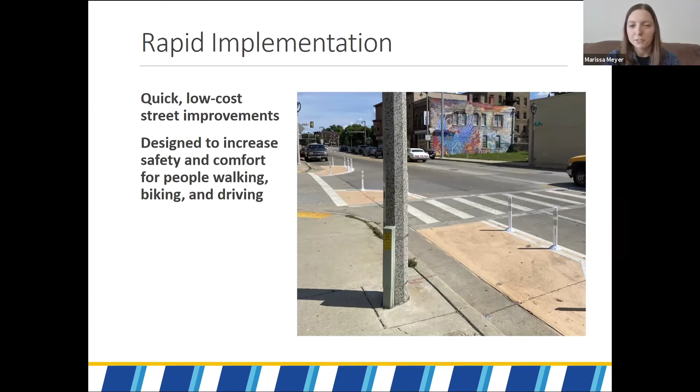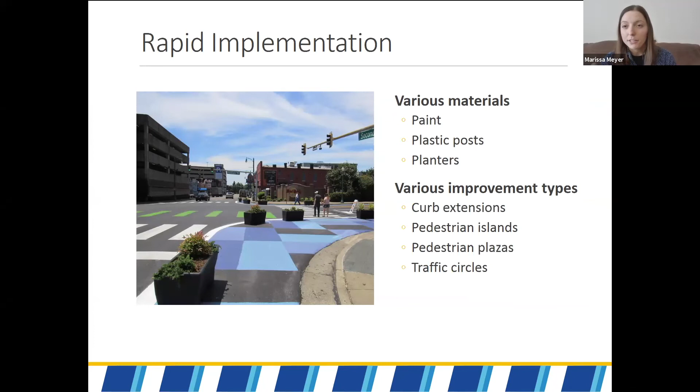These can be done with various materials. Usually paint and plastic posts are the primary ones used, but there can also be planters or other objects, even bike share stations or bike racks. And they can be a number of different types of improvements too. Today I'll be talking almost exclusively about curb extensions, but this rapid implementation style can also be used for pedestrian islands, pedestrian plazas, such as closing off a right turn bypass lane, or traffic circles as well.

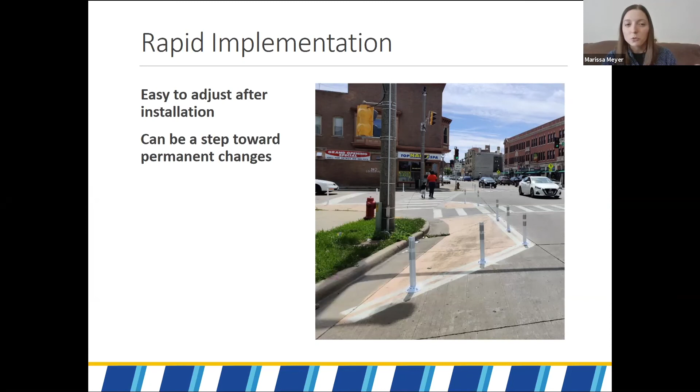These projects are easy to adjust after installation. For example, if you install these posts and it turns out the street is actually a little bit too narrow, you can come back in and move the posts another foot or two out. Whereas had you built that in concrete from the start, that would be a much more expensive change to make. But these projects can be a step towards permanent changes and building something in concrete.

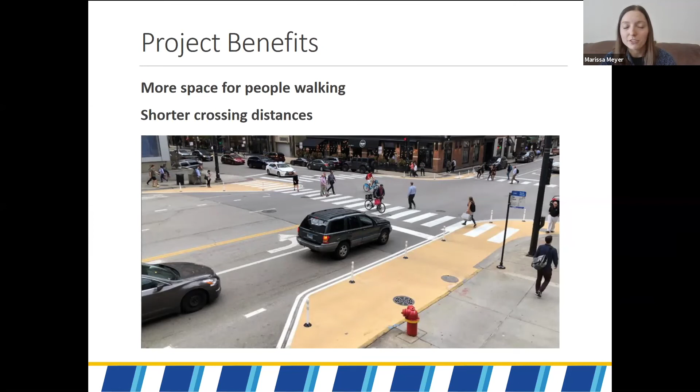One of the main types of benefits of these projects is that it literally creates more space for people walking. You can see in this image where a space of the street that is not sidewalk has been carved out for people walking and turned into a kind of pseudo sidewalk. And they also shorten crossing distances. If you can take 5, 6, 7, 8 feet from both sides of the street, that's that many fewer seconds that someone walking is in the street and potentially vulnerable to getting hit by someone who's driving.

They can also change the behavior of people who are driving. For example, if you build a curb extension, even if it's rapid implementation and it's only really plastic posts, people don't want to drive over those. So if a person is stopped, such as if they're going to turn left or if they're waiting for someone who is going to cross the street, instead of being able to whip around on the right side to pass that person, this rapid implementation stops that from happening, which is a major safety benefit. Rapid implementation can also slow motor vehicle speeds a little bit because they narrow the street visually and also tighten the turning radius, which forces people to slow down as they're taking a turn.

Another benefit is preventing illegal parking. In Milwaukee, we have an ordinance against parking too close to a crosswalk, but often that is not abided by very well, and you'll see people parking right up against the crosswalk. The problem with that is that it reduces the visibility of people who are about to cross the street, both from a person driving to the person walking and in the other direction as well. Rapid implementation can increase yielding to pedestrians, partially because of that visibility factor. It literally makes it easier for people walking and driving to see each other, and also because it sends a different message to people who are driving about what the purpose of this street is.

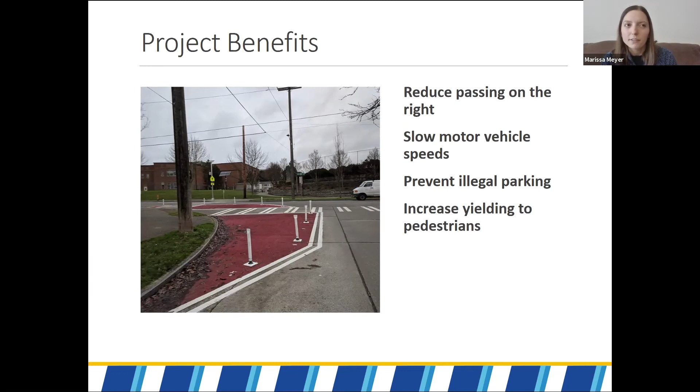So in 2020, we at the City of Milwaukee wanted to pilot this rapid implementation idea because we had seen it done in other cities very successfully, and we wanted to try and do it ourselves. Part of the reason for doing this was to address concerns about traffic safety that have come from our community all across the city.

Initially, when we conceived of this project, we were thinking that it would be funded by community organizations, primarily business improvement districts. But with the multimodal unit budget, we were able to fund it with city money, which did make it more equitable because we weren't putting that funding burden on the business improvement districts.

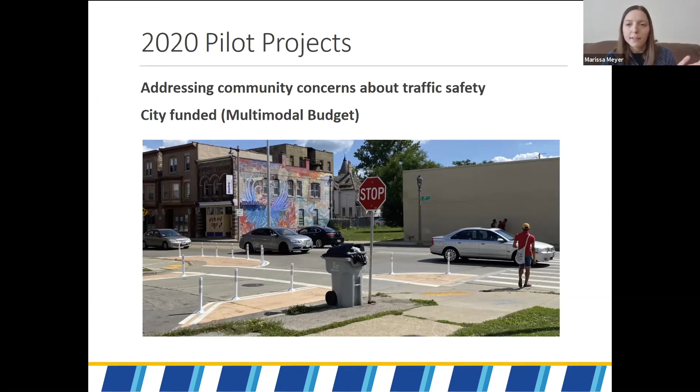We chose two different corridors, one north side and one south side, to do these projects on. For South 13th Street, we did 6 intersections, spreading from Harrison Avenue to Oklahoma Avenue. And then on North 27th Street, we did 4 intersections from State Street to Wells Street. For South 13th Street, we paired with the Crisol Corridor BID, and for North 27th Street, we paired with the Near West Side Partners.

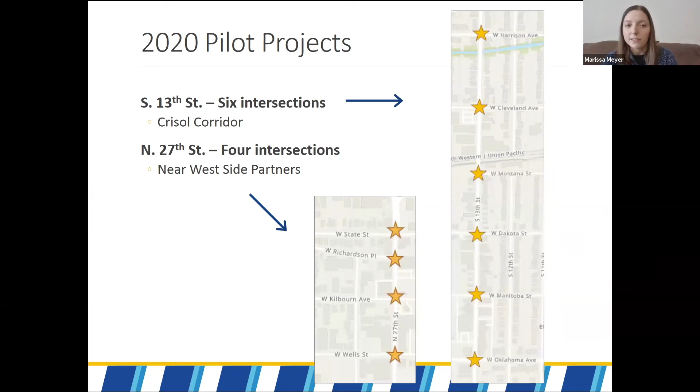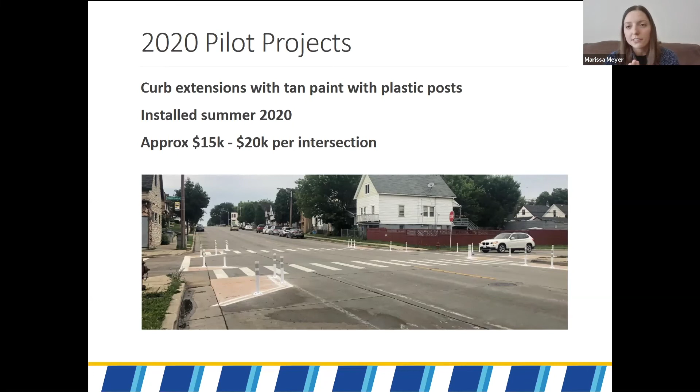For these projects, we did curb extensions with tan paint and plastic posts, and we installed them in summer of 2020. The cost was about $15,000 to $20,000 per intersection. We do hope that in the future that cost will come down because the bids were higher than we expected, so we're hoping in future years it will be even more cost effective than it was initially, because these costs are significantly lower than doing an intersection in concrete.

In order to do these projects, we needed to sign maintenance agreements with the BIDs, because one of the big concerns going into them was, if for example posts got knocked down, what would we do? How would we take care of it?

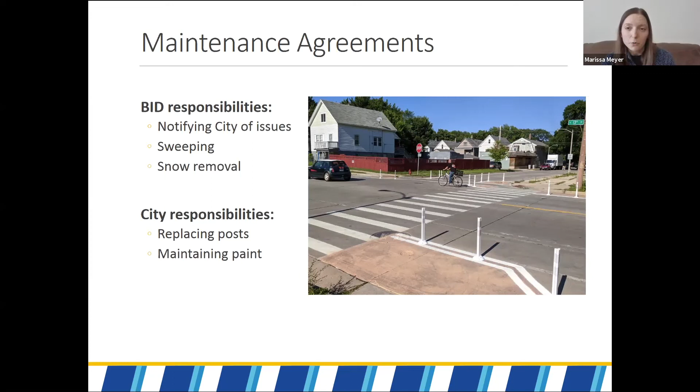So the BIDs were responsible for notifying the city of any issues, like posts getting knocked down, sweeping out these curb extension areas if debris was piling up because our city street sweepers can't reach behind the posts, and also removing snow, since similar to the street sweepers, the snow plows can't reach behind these posts. So we needed the BIDs to clear out the snow from the crosswalks so that people walking would still be able to get through. Meanwhile, the city responsibilities were replacing any posts that got knocked down and also maintaining the paint over time.

We were able to do a few different types of before and after studies, mainly speed studies, yielding studies, and some community surveys. With speed studies, these were done with a radar unit that we attach to a pole and just leave up for several days, and then we analyzed the results that it gives us.

We saw reductions in people's speeding, so just going over the speed limit to any degree, between about 10% to 18%. And then the really positive thing was that we saw a reduction in excessive speeding, so 10 miles per hour or more over the speed limit, of up to 40%. We know that speed drastically affects how serious injuries can be if a person driving hits a person walking, so seeing that reduction in excessive speeding was really encouraging.

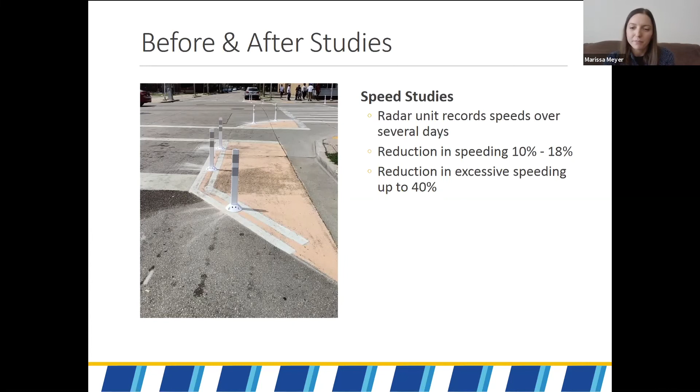We also did some yielding studies. These were done by having an observer, one of our transportation operations assistants, go out to some uncontrolled crosswalks on both of these streets. Uncontrolled here means there was no stop sign or stop light forcing the person driving to stop, so they would have to see the person walking about to cross the street and stop for them. The observer observed people who were naturally crossing the street already, and also conducted some test crossings too, in order to have more samples to analyze. Because, for example, if we only had 10 before and 10 after samples to look at, then it would be a lot harder to see changes between them over time.

We did see increases in yielding, which again was really encouraging. Mike Amsden actually mentioned these. We saw an increase of about 23% on North 27th Street, and on South 13th Street, because the initial yielding rate was so low, about 3%, we actually saw an increase of 6 times over the previous rates of yielding. So again, this was a huge benefit of this type of project.

Lastly, community surveys. As has been mentioned, the Safe and Healthy Streets survey on North 27th Street, we don't have the results from yet, but we were able to look at the Envision South 13th Street Together survey, which was done by the city's Department of City Development in partnership with some other community organizations.

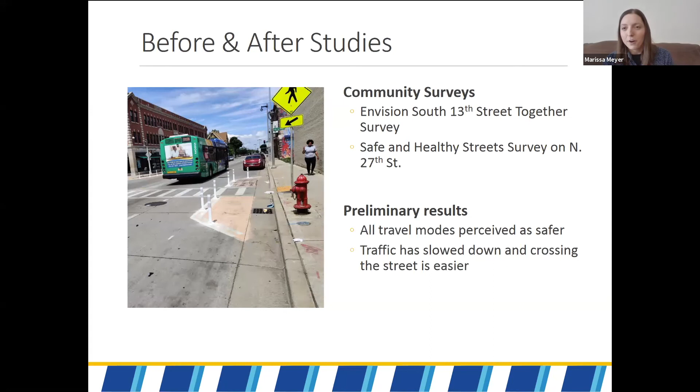There were a few big challenges to address. The most major and important one is snow removal. As I mentioned in the maintenance agreements, the BIDs were responsible for snow removal and hired contractors to do so, who did an excellent job.

But over this last winter we had quite a lot of snow, quite heavy snows, and this became a serious financial burden. That's a big problem, both in general and particularly for equity, wanting to make sure BIDs across the city are able to do projects like this going forward, even if they don't have several extra thousand dollars to drop on snow removal.

So our plan for this coming year is, in our maintenance agreements, to allow BIDs to tell us if snow removal is becoming too much of a burden, and we'll come through and remove the posts just over winter so the snow plows can come through as they normally would on other intersections throughout the city.

Then we can replace those posts come spring after we're done snowing, which hopefully will be in spring and not summer. But in future years going forward, we're interested in having the city handle or pay for snow removal in some form, but that's to be determined at this point.

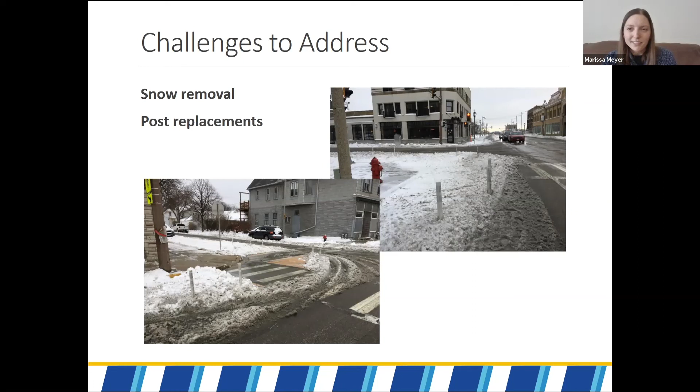The other challenge is post replacements, but thankfully this did not turn out to be nearly as much of a challenge as we were concerned about. The posts do get knocked down, but after an initial adjustment period, they don't get knocked down that often, so it's not too much of a challenge for the city to come back in and replace them periodically.

So what's next for the future? More locations next year, or this year. We'll be doing some projects on North Avenue as well. We'll be doing more studies and community surveys.

Both the three types I described before, and also other types of community surveys and community interaction, as Mike mentioned at one point, tracking how much passing on the right there is and how much this type of project can address that issue. We'd also like to look at other types of future improvements, such as decorative crosswalks rather than just regular crosswalks.

And also decorative paint within the rapid implementation, so in place of the tan paint, doing some sort of decoration. Another possible change for the future is planters or other types of barriers, so moving beyond only plastic posts.

Long term, we would like to turn all of these projects into concrete, to move from the preliminary interim rapid implementation to, once we have the funding, actual concrete curb extensions, pedestrian plazas, traffic circles, etc. So we're really excited about these projects, and it's very encouraging to see that both the data we got back and the community surveys support the positive results we've seen. Thank you very much.

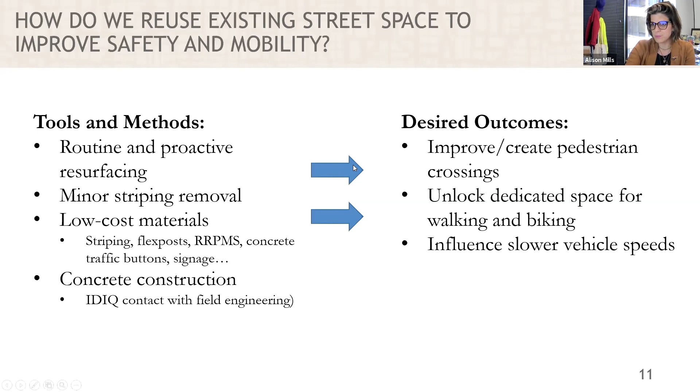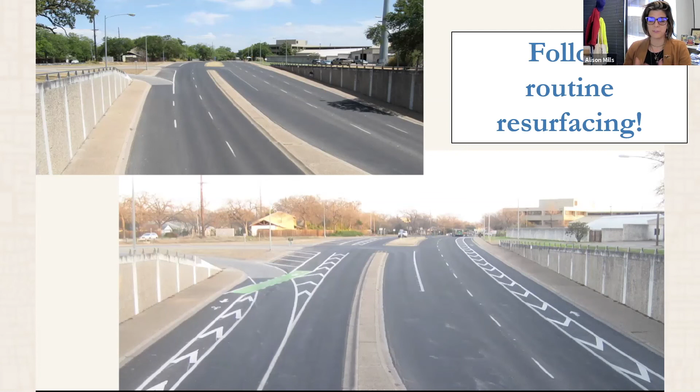Historically, we've been able to really expand our bicycle network by following our public works department's resurfacing schedule. They resurface tens of miles of city streets a year, which allows us this blank slate to move lines around, narrow travel lanes, influence slower speeds, and dedicate space to that vulnerable user. In simpler times, we were doing up to 30, 40 miles of bike lanes a year, rapidly expanding our bicycle network this way.

We not only use excess street space for biking, but we also sometimes use it for walking. We have a pretty severe deficit of pedestrian infrastructure here in Austin, Texas, in the billions of dollars. Although we have ramped up our construction of missing sidewalks, there are still people who will not see sidewalks in 10 years, depending on the prioritization.

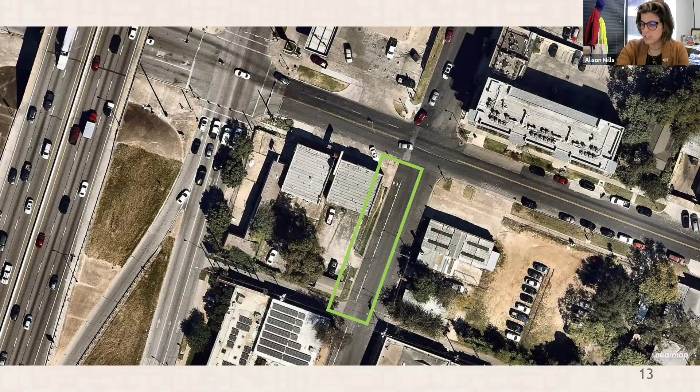So there are times where we get creative. We use those same low-cost materials to carve out space, especially where we have a high number of pedestrians. This is an example from our east side, one of the places in my area where we see a whole lot of pedestrians, and we want to make sure they are separated from vehicle traffic. This has been in for a while, still haven't managed to construct an actual sidewalk.

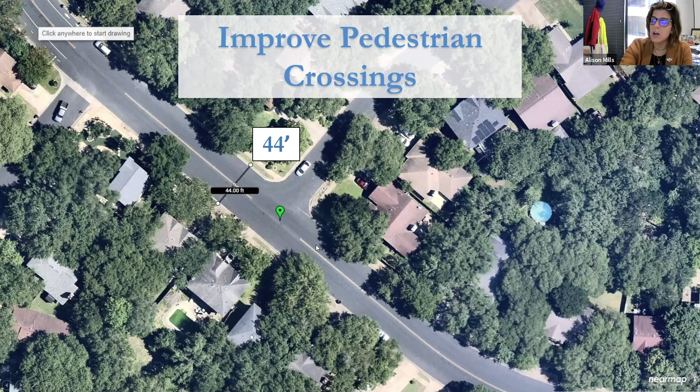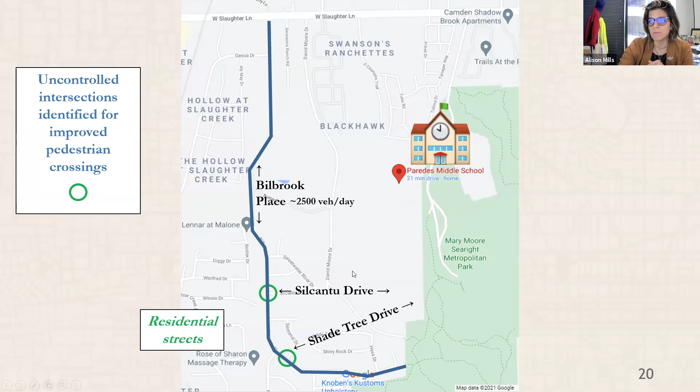This is an opportunity that we have, and this is a recent example where we were able to improve walking to a middle school by adding 2 crossing islands across a street called Bilbrook. That 44 feet allowed us space to do something pretty high quality and also significant as far as influencing slower speeds, creating that 2-stage crossing and a place in the middle where someone can evaluate one direction of travel for a gap, have a substantial place to stand, and then evaluate the other side before completing the crossing.

I'll quickly go through the elements of the crossing itself that help to influence slower speeds. You've seen this a lot today, but the use of flex posts on the side of the street to narrow the traveled space for vehicles. The striping creates the horizontal deflection, as does the island itself.

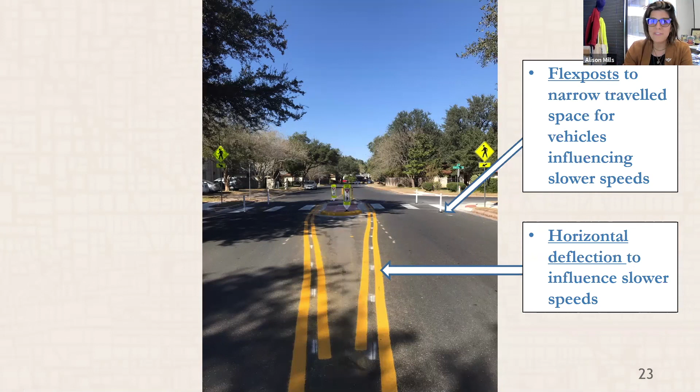We have to add a lot of bells and whistles to the island itself because people will hit it. We add paint, delineators — those are the flex posts — raised pavement markers, the flexible yield to pedestrians signs (we are a yield-to-pedestrian state), and continental crosswalk markings. But I think they came out pretty nice anyway.

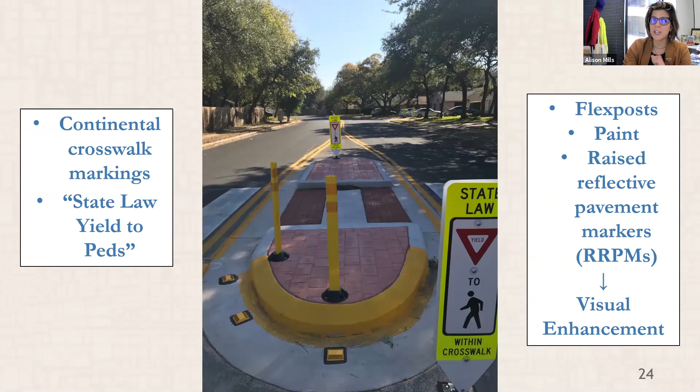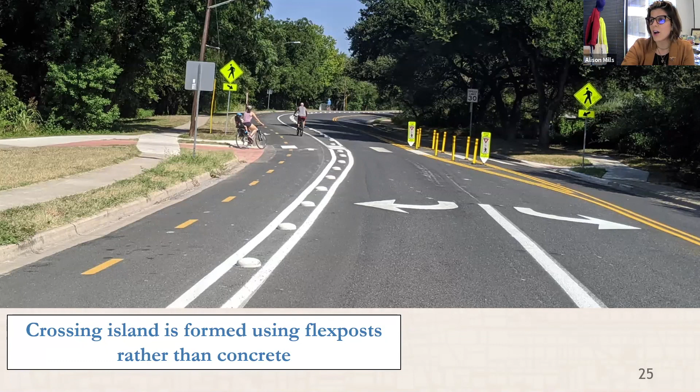This is just a really great example of another really wide street where we're able to reuse the street space and narrow the travel lanes, creating space for other users and improving the experience for pedestrians. There's also a trail off screen. So this is just all improvements for all modes at play here. This was a really exciting project.

Another project, a pretty large scale project, we'll be able to touch on how we incorporate and seek out the feedback of the public, was a lane conversion project we refer to as a buffered to protected project, where we take a bike lane that was previously just buffered, strictly painted lines between the travel lane with vehicles and the traveled space of bicycles, and we actually add protection.

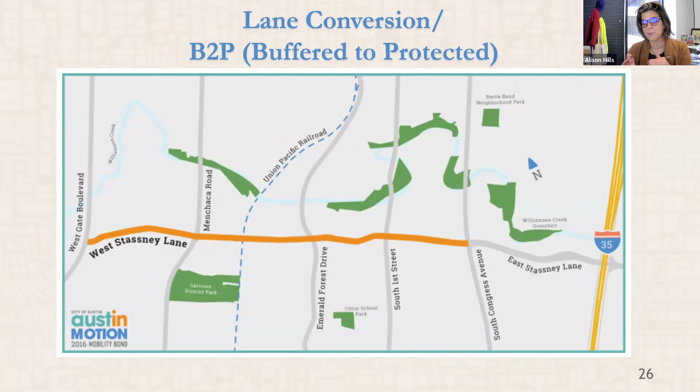This project was actually initiated back in 2016, and yours truly was the project lead. An important lesson learned was that we would hold the meeting in a library, a classroom, a mixed bag sometimes on whether there'd be chairs or no chairs. In this case, there happened to be chairs set out throughout the room, and although our intention was to have one-on-one conversations with people, the chairs sent the message that there was going to be a presentation. So many people came in, sat down, waited for a presentation that never happened, and they weren't happy, especially because we were trying to take a travel lane away from them.

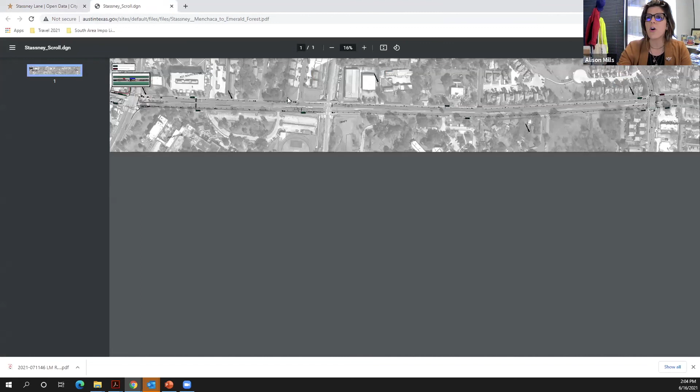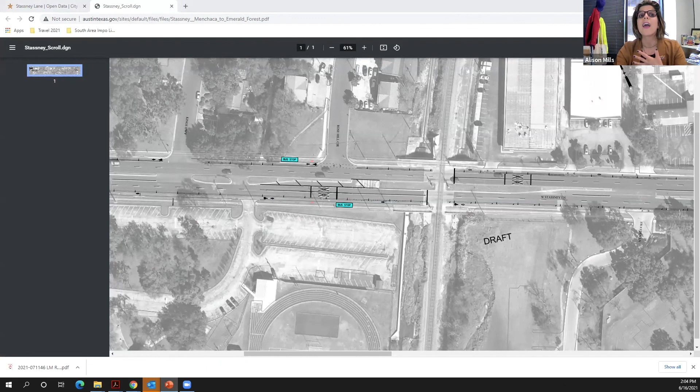There's an actual schematic of the project itself. The depth of our website, and what we make available to the public, has really increased over time. So that's just a quick peek at what we try to make available to the public, to be transparent, to be communicative, so people feel like they know what's going on and how their world is going to change based on what we're proposing.

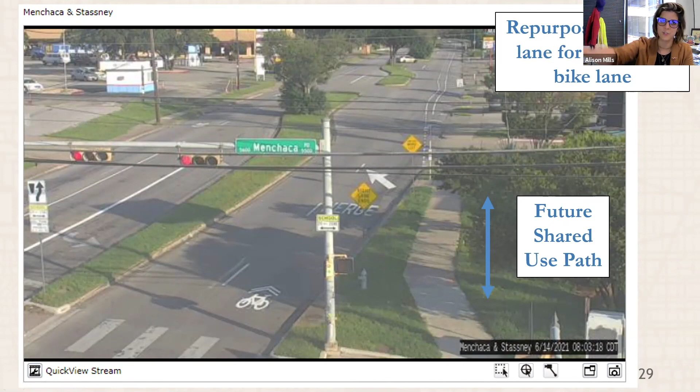So thank you all for having me here today, and for those of you out there fighting the good fight to improve safety and mobility in your own cities. I'm happy to hear from any of you and answer any questions you might have.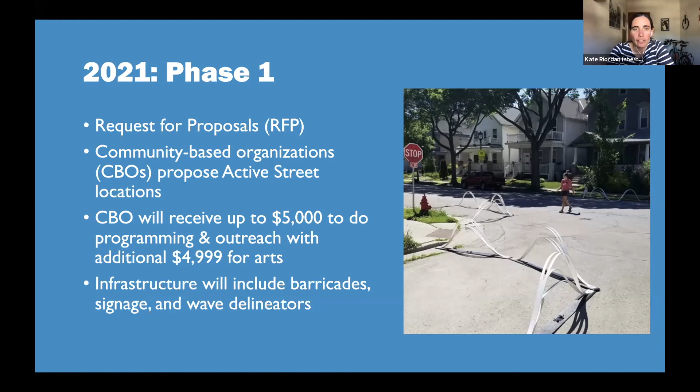So we're using barricades and signage again, like I said, and then we have not yet, but we will be purchasing these wave delineators that you can see in this image here, where we can create very temporary curb extensions on an intersection on the active street.

So as DPW, we're providing ongoing technical assistance. I think another thing that wasn't thought of as an initial responsibility is that now these community groups and residents have a connection to the city. I've had community groups who I'm working with tell me, we've got an issue with this, I know this isn't what you do, but can you help connect me with other people? So I think we're also creating this touch point to the city and helping people get other things done.

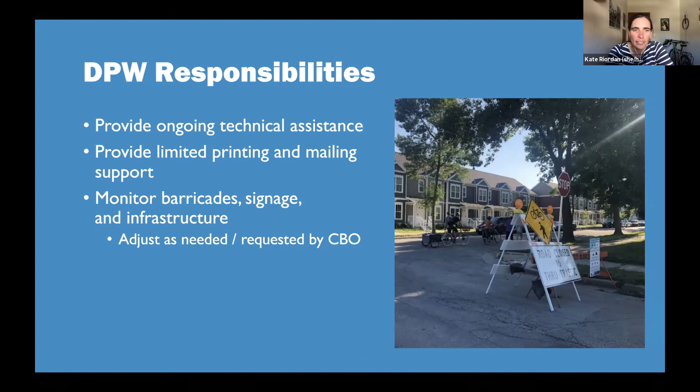Each location has $4,999 for arts, so the organizations have a menu of options. I've gotten lots of requests for painted crosswalks, intersection murals, maybe a community flag. It's really up to what the community members want. AWE is really great about working with the community members to identify local artists and work with those artists from the neighborhoods to do this type of art.

The furthest north is Northwest Side CDC, on North 25th Street. Number 2 is Metcalfe Park Community Bridges, we heard from Melody earlier today, so these are the streets surrounding Butterfly Park. Number 3 is Cherry Street, which is managed by United Methodist Children's Services, and number 4 is Washington Street, managed by 16th Street Community Health Centers.

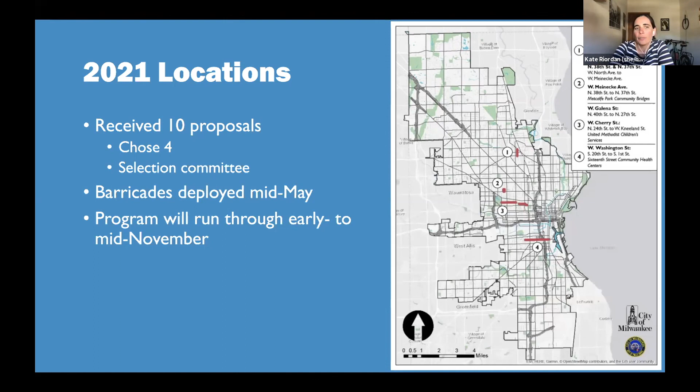All of these organizations have proposed really fun and great activities to have throughout the summer and fall on their active streets. The active streets are up and running right now, and the program will run through early to mid-November. About 1.5 to 2 weeks ago, we held a kickoff.

It was also really great, we heard from a resident too, who said she loves that she's getting to meet and know her neighbors. She's been living on the street for more than 30 years, and this has really helped her get out and meet others, and that's really what we want to do.

So like I said, this is really supposed to be a long-term commitment to these neighborhoods and residents. This is supposed to be a 3-phase program. We're in phase 1, so next year will be phase 2. There may not be interest from all the organizations to go through phase 2, so we'll evaluate eligibility and interest at the end of this year.

In phase 2, the organizations will select a smaller section of phase 1. We'll again hire and provide funding for the community organization to do some outreach and data collection, and we will install what I'm calling semi-permanent traffic calming infrastructure.

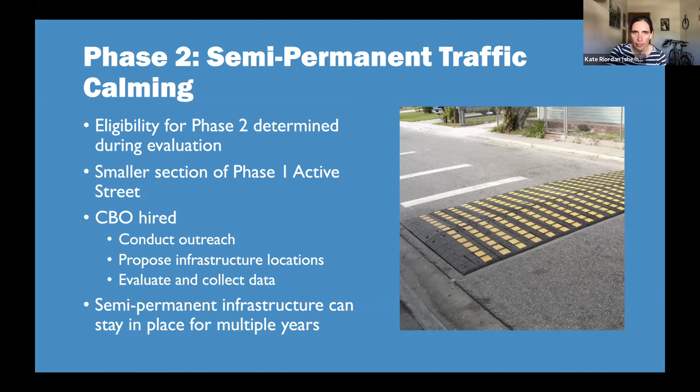And then phase 3 would be permanent infrastructure. So figuring out what worked best with that semi-permanent infrastructure and actually constructing it, so that we have permanent traffic calming infrastructure, the type that residents want based on what we discovered in phase 2.

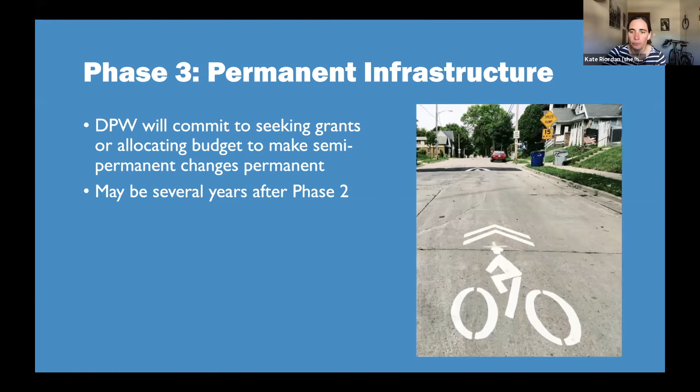So lastly, I've got some breaking news, very exciting. We just received, and I think we just found out last week, we received an equity and mobility grant from People for Bikes to accelerate phase 2 to this year. So on just one of the streets, we'll be working with United Methodist Children's Services on Galena Street, since we kind of did phase 1 last year with the active street.

We just started conversations with them, so I'm really looking forward to trying this out. We'll figure out what works, how much things are going to cost, and then we can make sure that we have good processes and procedures and the adequate budget to do phase 2 for the other streets in coming years.

So thanks everybody. There's the program website if you're interested in learning more, milwaukee.gov/active streets 2021. So thanks so much.

Thank you to Kate and to all our presenters. We have a couple of questions in the chat. I'm going to go first to Kate, and then we'll circle back and have a question for Allison. Kate, the question is whether there's an organization like Artists Working in Education that isn't artistic, but more focused on science and engineering.

That's a great question, and I don't think I know the answer. Maybe if anybody else is able to unmute, if they have any insights about an organization like that, we'd love to hear about it. Yes, that'd be great to know. Or maybe even homework for some of us to do overnight and bring it with us tomorrow. All right, well we'll kind of let that simmer. If anybody has ideas about that, contact one of us, because I think it's great to get these various organizations involved for these kind of improvements.